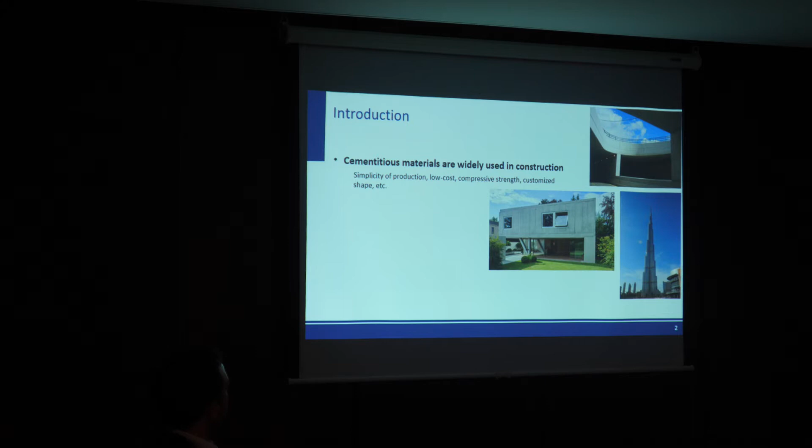Okay, just for motivation, you are all aware, you're coming from the cement industry or from construction building materials. You know the advantages and disadvantages of cementitious materials. But their main drawback is cracking, as you all know. So we have to find some routes to make this disadvantage into an advantage.

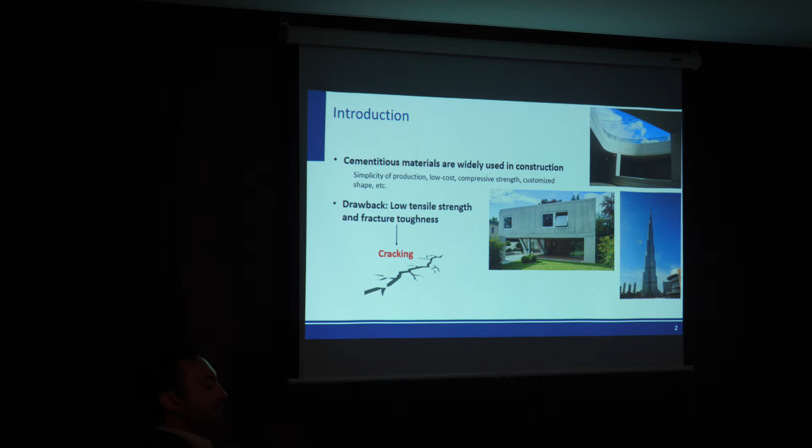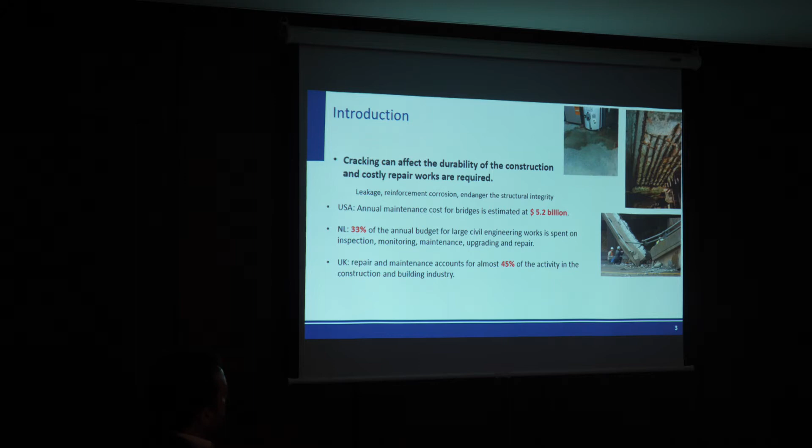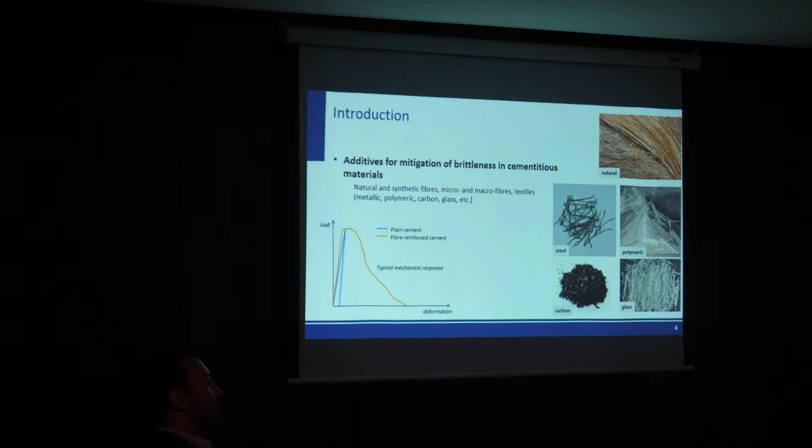With regard to repairing, we have seen the plenary lecture by Professor Ferro, saying that we need a lot of billions to maintain or repair cementitious infrastructure. So one possible solution might be some additives targeting reinforcing either at the micro level up until the last decade, or at the nano level during the past decade.

My presentation is dedicated to reinforcement at the nanoscale, and at this period of time we are working with graphene nanoplatelets. For those of you that are not aware of graphene nanoplatelets, it's actually atoms of carbon structured into layers. So it is considered a two-dimensional material at the nano level.

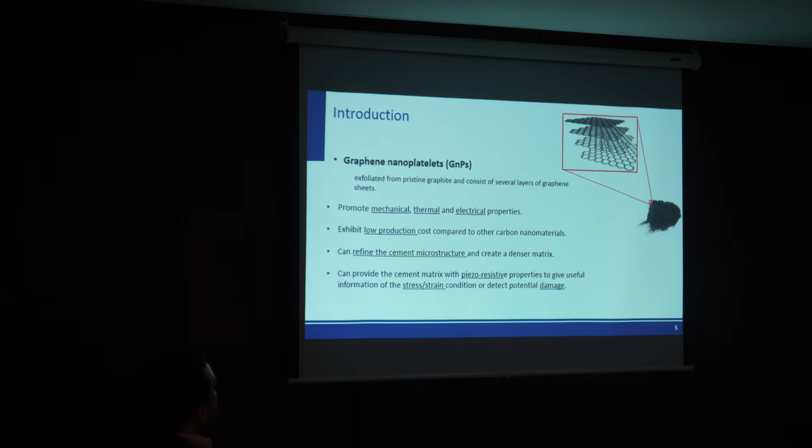And why we need the graphene nanoplatelets is because besides the cracking resistance, at the appropriate levels they also promote electrical properties. We are transforming the non-conductive matrix into a conductive matrix. And any cracking or any damage could be detected by our matrix, which acts as a resistor.

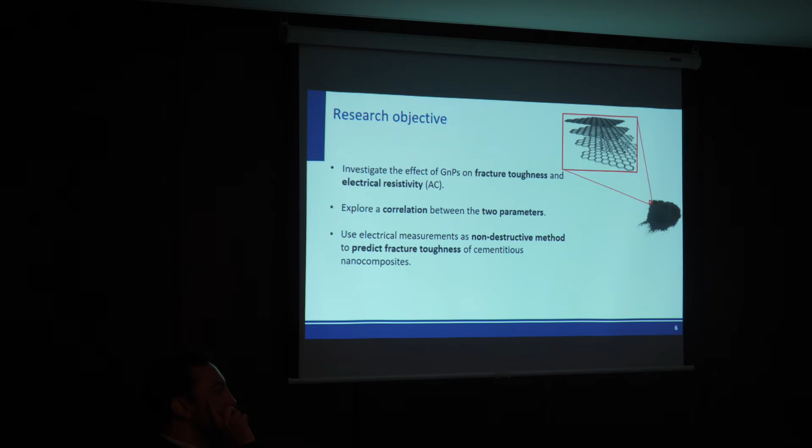So to this end, we performed three-point bending tests. This is ordinary Portland cement. And this is the sketch. It's 20 millimeters width, and we had a starting notch of 5 millimeters. So 1 out of 4 is notched. We have used the respective standard to measure the critical stress intensity factor, or in the literature also referred to as K1C.

And in the meantime, on other specimens, we have measured the electrical conductivity. You can see the electrical setup down here. It's the two-wire method. There are two electrodes, voltage with AC. So voltage comes, and then we measure the electrical impedance of the bulk of the material.

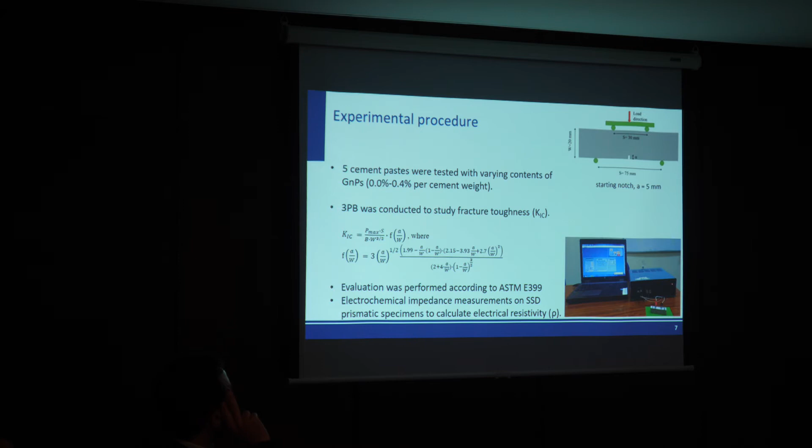This is according to the literature, because even at such small contents, reinforcement takes place, because they are reinforcing at the nanoscale. So nano cracks are prohibited from being promoted. That's why this enhancement is evident.

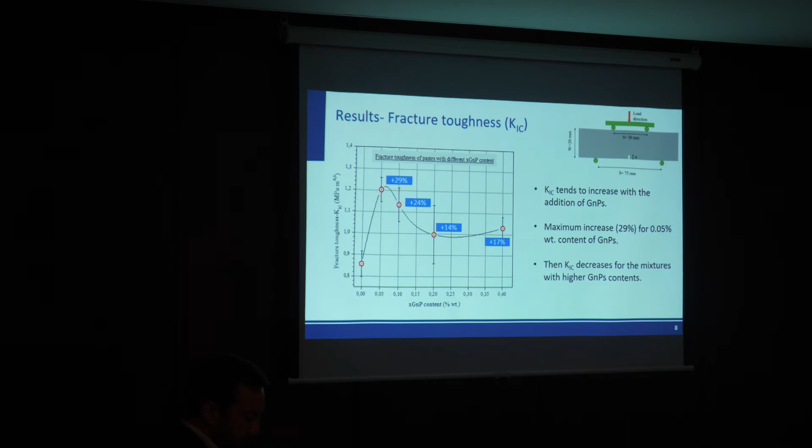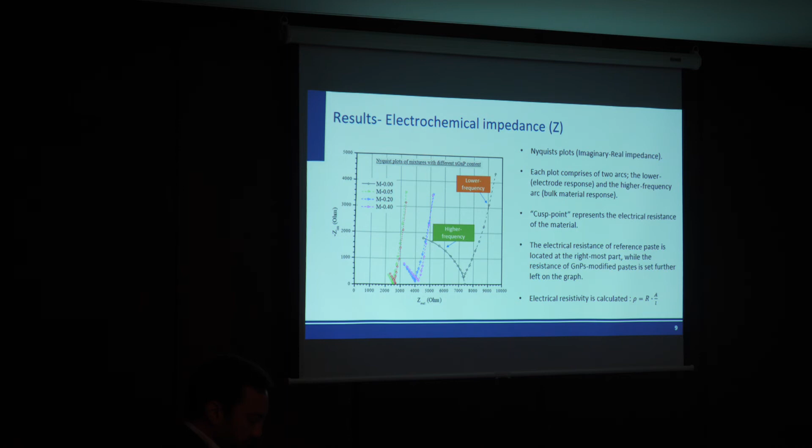as you can see, for the different concentrations, you see a cusp point that, according to the literature, is the typical value for electrical resistivity. So this cusp point gives us information about the bulk resistivity of the material. So with this easy to perform method, we measure the electrical properties of the new material.

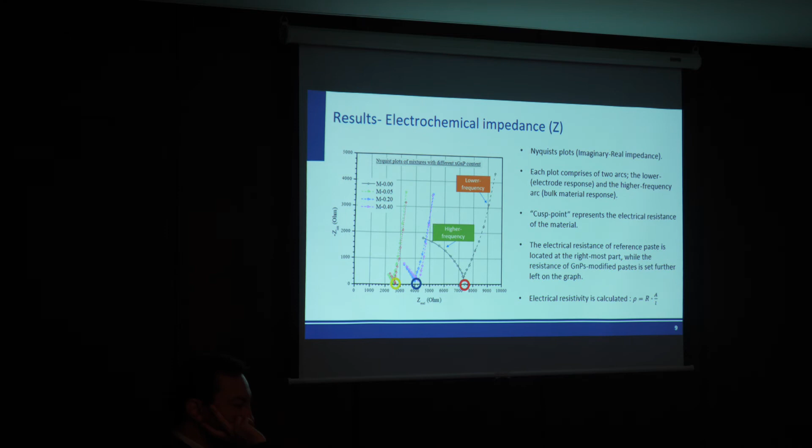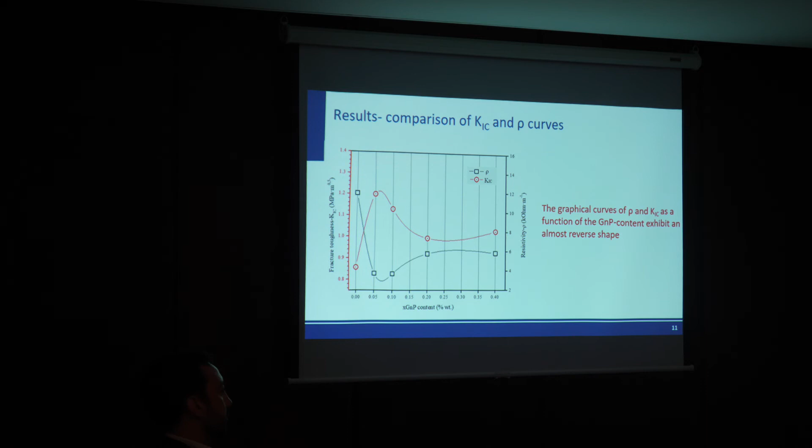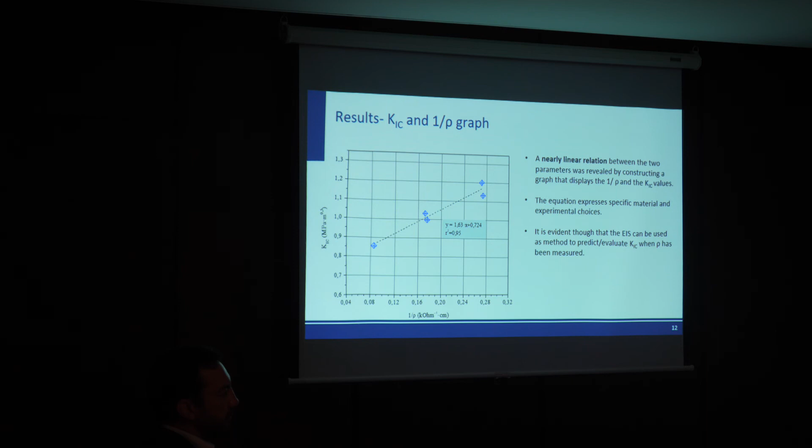So we thought simply to make a trend line of K1C on the y-axis and inverse of resistivity on the x-axis. And then you can see that you have a perfect, direct, linear correlation. That, of course, is something that we first report, and we need to investigate it in other kinds of materials, more different kinds of graphene nanoplatelets, and so on. But this is something that triggered our understanding, and we need to report it.

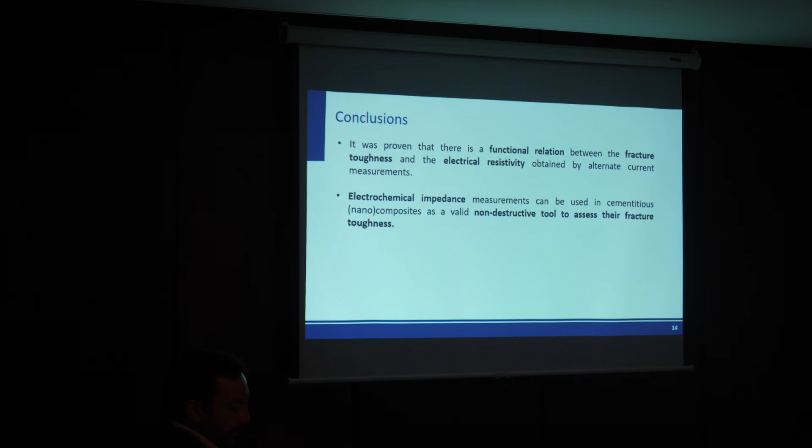So, these are our preliminary results, and I would like to thank you very much for your attention.

Thank you, Nicola. Are there any questions? Please. You can go first.

So this is basically a method for measuring the K1C, but your long-term goal is to turn it into a measuring device. We're measuring K1C, yes, and the other method is the ohmic resistance of the bulk material. And these properties are connected because if you have lower electrical resistance, this means that electrical current can pass. So this means that you have a good dispersion of the nanoparticles.

This means that if a crack tries to pass through, then it has specific obstacles to cross. So you basically measure the dispersion of the nanoparticles. Exactly. With electrical resistance, you can measure the dispersion. And then you hope that you could also turn that into a measuring device. Because when the resistance goes up, then you have a crack inside. Yes, it is in fact a structural health monitoring attempt.

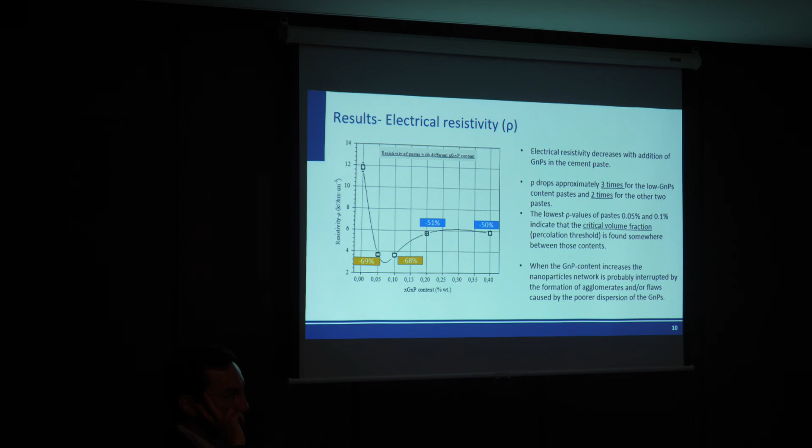Another question? Okay. Thank you, Nicolas.